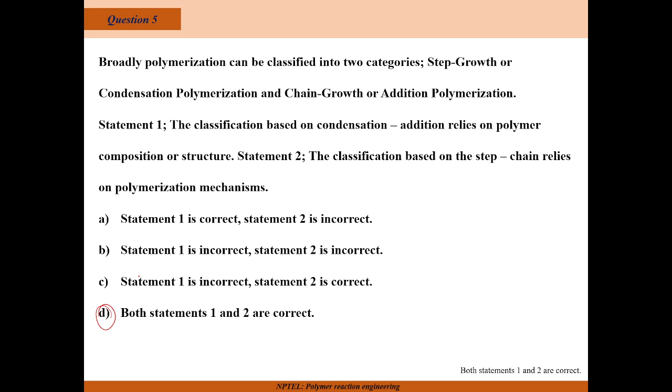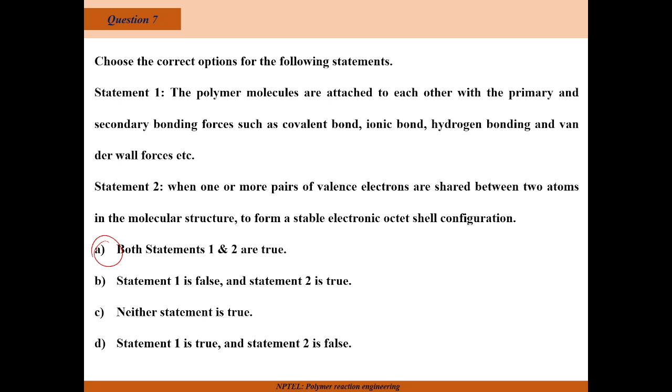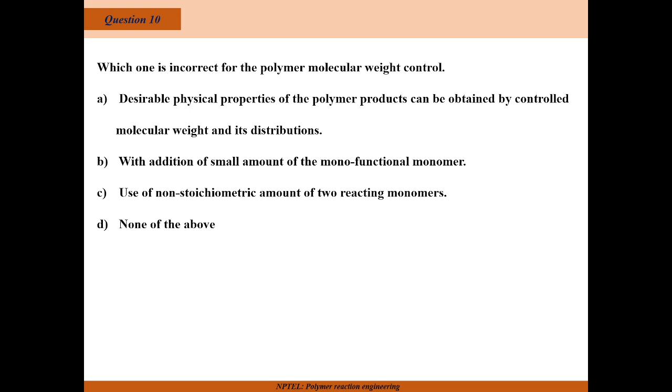With the addition of a small amount of monofunctional monomer, definitely we can control it. It will attach at one end, and there is no other end for further monomers to attach. So that is a true statement. Use of non-stoichiometric amounts of two reacting monomers will definitely lead to some kind of termination, which leads to control of the polymer molecular weight. So the correct option is option D, none of the above. Okay, now let's move on.

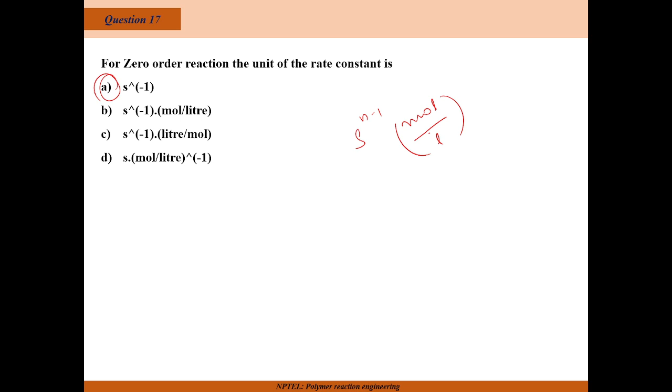Okay. So for a zeroth order reaction, the unit of rate constant is dash. So we have discussed the general formula for this. Okay. So yeah, the answer to this question is second inverse. So the general formula which we discussed was second to the power n minus 1, mole per liter to the power n minus 1. So this was the formula that we used, and by this, when n is equal to 0, we can get s inverse. So the answer to this question is s inverse. Okay, fine. So let's move on.

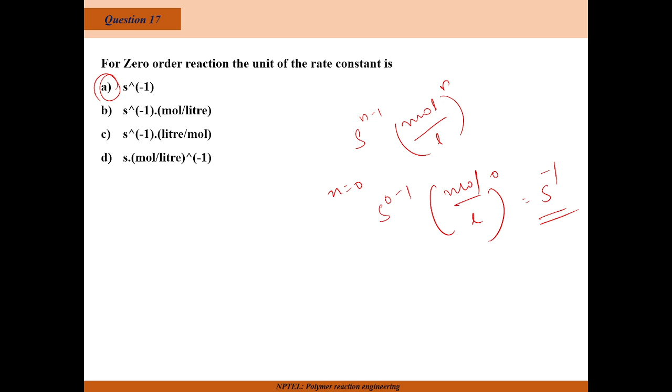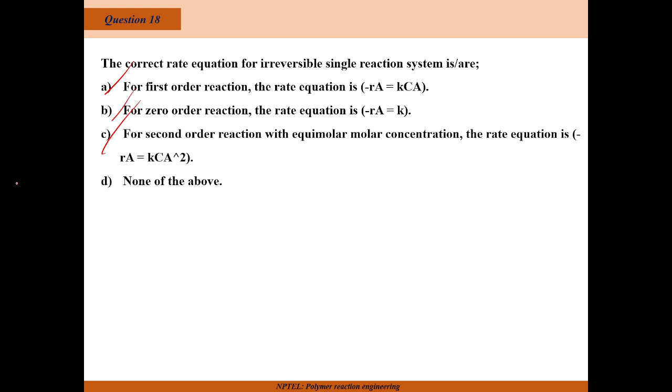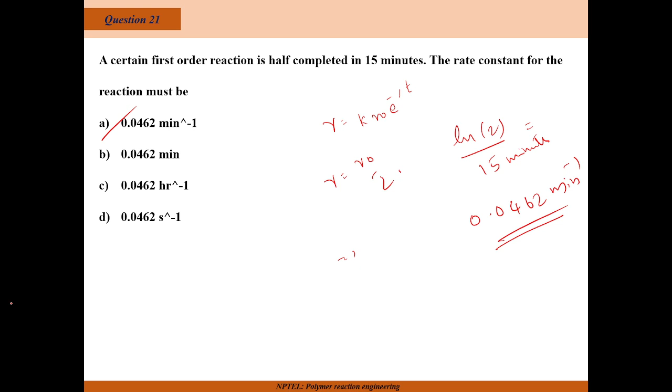Okay, so we know the general formula. It was something like R equals K times R naught, e to the power minus lambda t, and it says that R becomes R naught by 2. Rearranging, we can get the answer. The point becomes log 2 by 15 minutes. When we solve this, it gives an answer of 0.0462 per minute. So this is the answer.

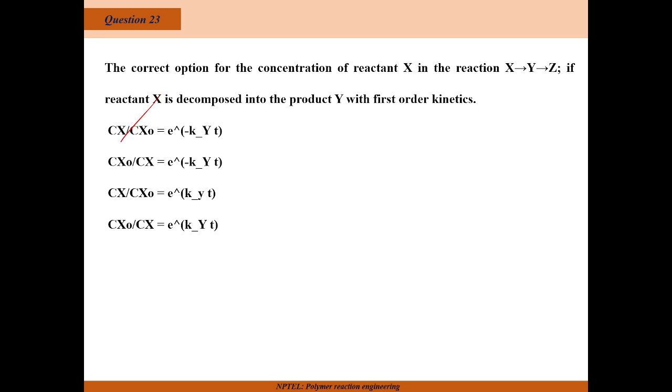Okay, so the answer to this question is option A. This is the correct option. Cx by Cx naught is equal to e to the power minus k into t. So this is the correct option. Okay, now let's move on.

For a recycle reactor, select the correct option. There are multiple options here. Just try to read and I'll discuss the answer later.

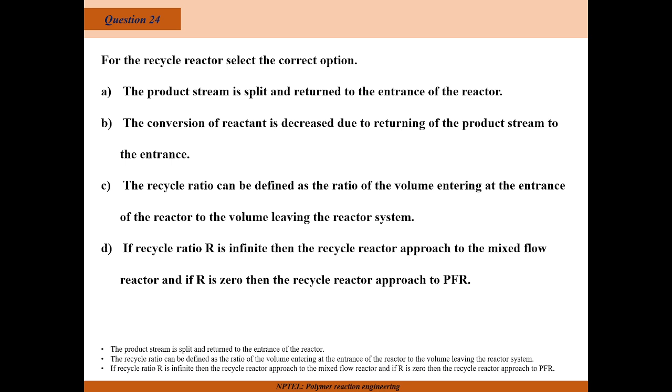So the correct answer is, there are multiple correct options. The product stream is split and returned to the entrance of the reactor. The recycle ratio can be defined as the ratio of volume entering at the entrance of the reactor to the volume leaving the reactor system. If recycle ratio R is infinite, then the recycle reactor approaches a mixed flow reactor, and if R is 0, then the recycle reactor approaches a PFR. Okay, so these are the statements.

So now let's move on. This is the 25th question. If recycle ratio R is infinite, then the recycle reactor approaches a plug flow reactor PFR, and the performance equation of the recycle reactor will become the same as the performance equation of PFR. So is this a true statement or a false statement? Just think for a while, then we'll discuss the answer.

Okay, so actually this is a false statement. It doesn't become a plug flow reactor. The recycle reactor with recycle ratio 0 will become a PFR, not when R is infinite.

So let's move on. This is a two statement question, and there are four options. We have to say which one is correct and which one is wrong. The first statement is: in an autocatalytic reaction system, one of the products acts as a catalyst. Statement 2: to start an autocatalytic reaction, there is a need for a small amount of product. So which one is correct? Just think for a while, then we'll discuss the answer.

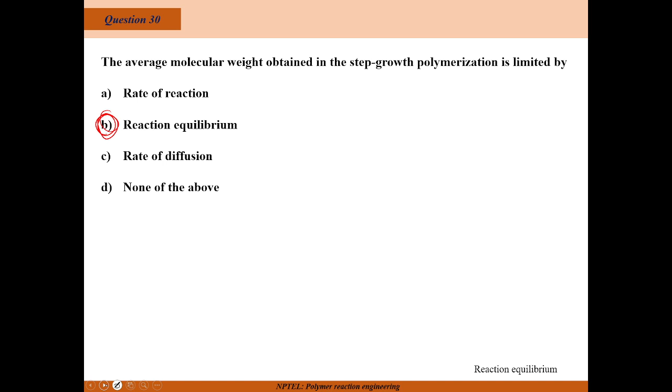Which of the following polycondensation techniques is useful in the manufacturing of reverse osmosis membranes, encapsulation of inks, insecticides, and medicines?

There is definitely something for reverse osmosis, and this is an interfacial process, so from that itself we can say the answer is interfacial polycondensation. Now let's move on.

The termination in ionic chain polymerization can occur through: recombination of counterions forming sterically hindered ions having very broad charge distribution, forming a sterically hindered ion having a very narrow charge distribution, or none of the above. Which one is the correct answer? Just think for a while, then we'll discuss the answer.

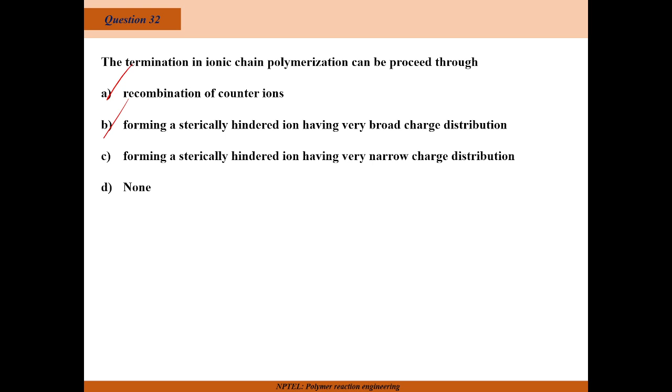The correct answer is that multiple options are actually correct. The first correct option is recombination of counter ions, and the second is forming sterically hindered ions having a very broad range of charge distributions. So A and B are the correct ones. Now let's move on.

Moving to the next question, this is also a two statement question. Statement 1: free radical species formation occurs through homolytic cleavage. Statement 2: the number of free radical species present in the system should always be high to propagate the radical chain polymerization. Options: statement 1 true statement 2 true, statement 1 false statement 2 false, statement 1 true statement 2 false, statement 1 false statement 2 true. Which is the correct option? Just think for a while, then we will discuss the answer.

The correct answer is that statement 1 is true but statement 2 is false. So option C is the correct one. Now let's move on.

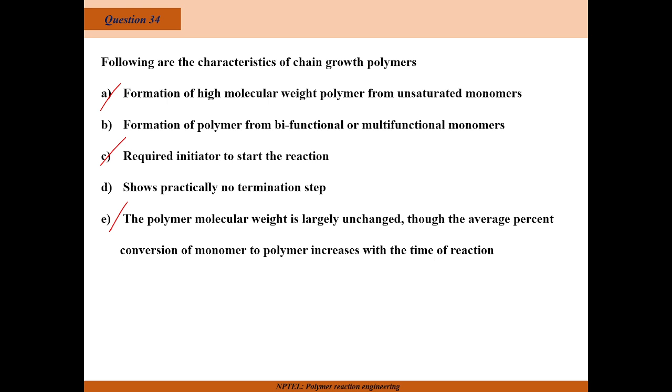Let's move on to question 35. Statement 1: ionic polymerization is monomer selective, that is, a specific type of monomer can be polymerized through a specific kind of ion depending upon the resonance characteristic induced with the specific functional group. Statement 2: radical polymerization can usually be used to polymerize most of the addition polymerization species. Which one is correct?

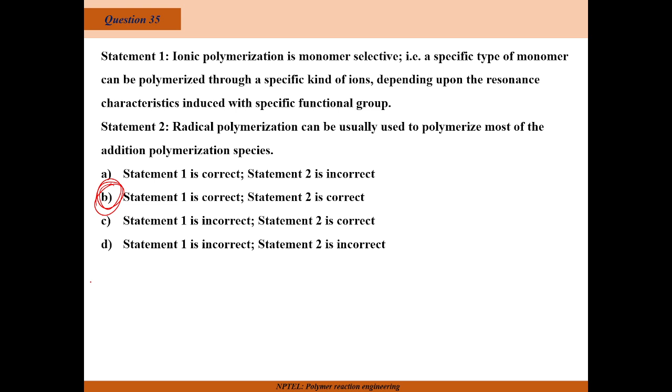The correct option is that both statements are true. Statement 1 is true and statement 2 is true. Now let's move on.

During ionic polymerization, the polarity of the solvent affects the polymerization reaction, and hence preferably the polarity of the solvent should be: low polarity, moderate polarity, or high polarity. Water should be added to increase the polarity. Which one is the correct one? Just think for a while, then we'll discuss the answer.

The answer to this question is that it should be of moderate polarity. Okay, fine, now let's move on to discuss the next question.

The rate of disappearance of initiators in chain polymerization reaction generally follows: zeroth order kinetics, first order, second order, or third order. Which one is the correct answer? Just think for a while, then we will discuss this.

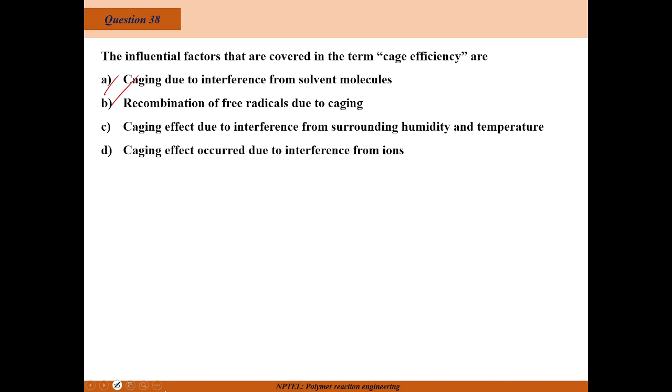Now let's move to the next question: inhibitors are used to start the termination of the polymerization reaction, to avoid premature thermal polymerization during transportation and storage, to avoid ionic species formation during the polymerization reaction, or all of the above. Which one is correct? Think for a while, then we'll discuss the answer.

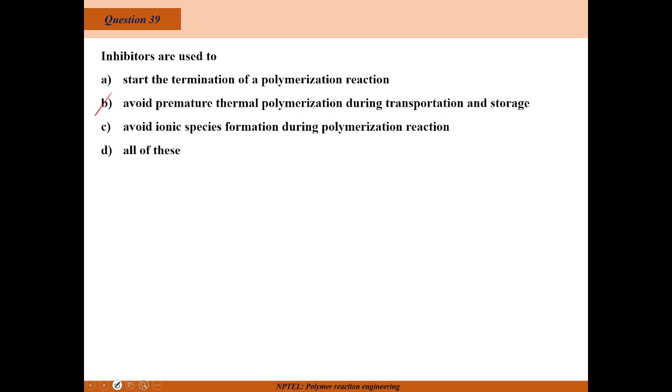The correct answer is to avoid premature thermal polymerization during transportation and storage. Now let's move on to the next question.

The rate of propagation for radical polymerization involving inhibitors is: directly proportional to concentration of inhibitor, directly proportional to square root of concentration of inhibitor, inversely proportional to concentration of inhibitor, or inversely proportional to square root of concentration of inhibitor. Which one is correct? Think for a while, then we'll discuss that.

The answer to this question is inversely proportional to the concentration of inhibitor, which is option C. So that is the correct answer. Okay, now let's move on.

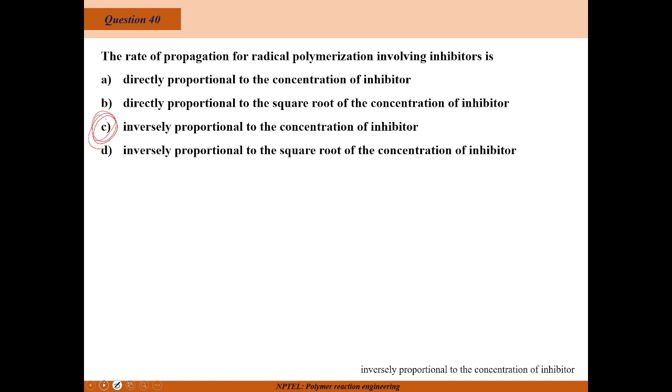The technique which uses the change in volume of the polymerization solution as a parameter to determine the polymerization rate is: mass spectroscopy, precipitation technique, dilatometry, or NMR technique. Which one is correct? Think for a while, then we'll discuss the answer.

The answer to this question is dilatometry. Dilatometry is a technique where we measure the polymerization by measuring the change in volume of the solution. Now let's move on.

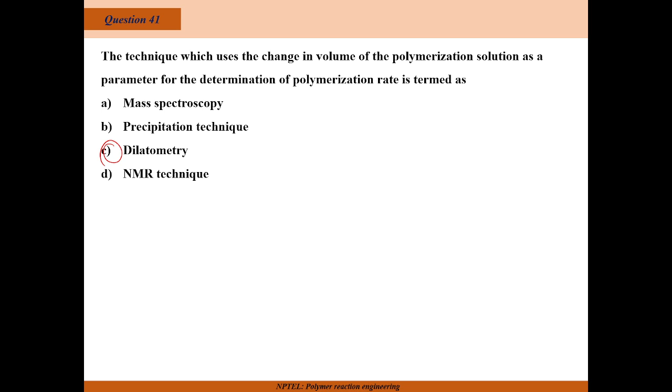Which of the following compounds can be used as an initiator in aqueous medium: hydrogen peroxide, formic acid, hydrazine, or sulfonic acid? Think for a while, then we'll discuss the answer.

The correct answer is hydrogen peroxide, so A is the correct answer. Now let us move on.

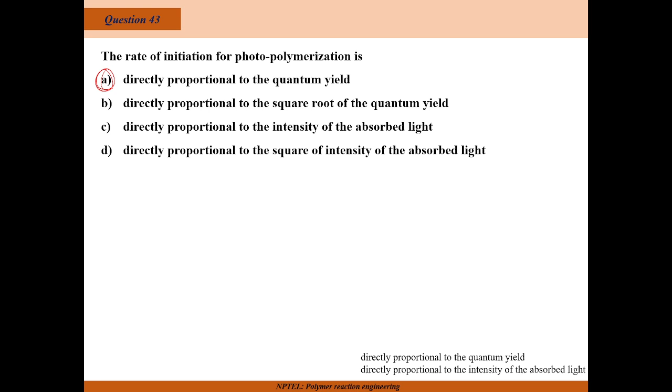The answer is already given, so there is no need for you to think. The rate of initiation for photopolymerization is directly proportional to quantum yield, and it is directly proportional to the intensity of the absorbed light. So the correct options are option A and option C.

Now let's move on. The rate of propagation for photopolymerization is - this question is about propagation, while the previous question was about initiation. Think for a while, then we'll discuss the answer.

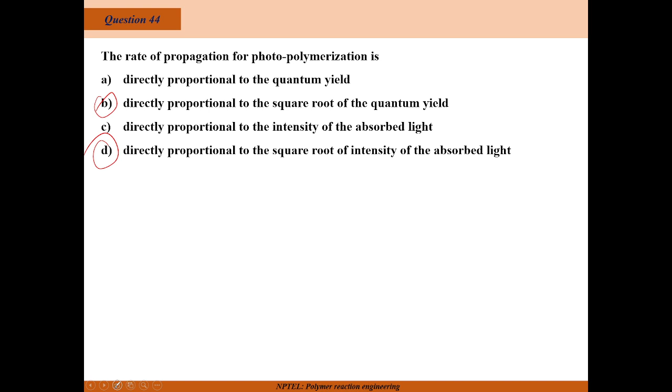The device used for calculating the intensity of absorbed light during polymerization is: dielectrometer, actinometer, tensiometer, or rotameter. Which one is correct? Think for a while, then we'll discuss the answer.

The correct answer to this question is actinometer. Generally, actinometers are the devices that calculate the intensity of absorbed light during polymerization. Okay, let's move on.

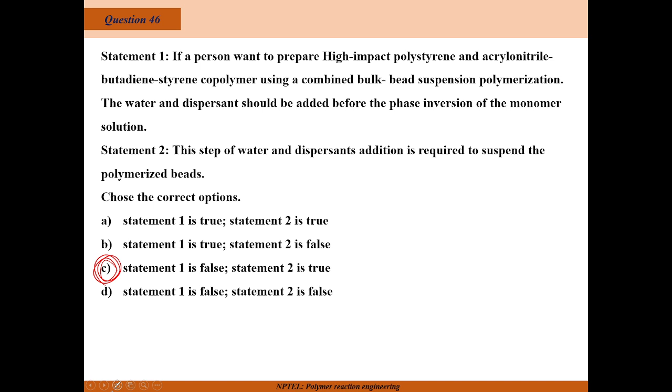The correct answer is statement 1 is false and statement 2 is true. Statement 1 is false and statement 2 is true. Let's go to the next question. This is also a statement question.

It says that in semi-continuous and continuous emulsion polymerization, sufficient free emulsifier is usually required to stabilize the oligoradicals that precipitate in the aqueous phase. Statement 2 states that in semi-continuous and continuous emulsion polymerization, sufficient free emulsifier is usually required to saturate the surface of existing interfaces and form micelles.

So which statement is true? Statement 1 is true, statement 2 is true; statement 1 is true, statement 2 is false; statement 1 is false, statement 2 is true; statement 1 is false, statement 2 is false. So which is the correct option? Just think for a while, then we will discuss the answer.

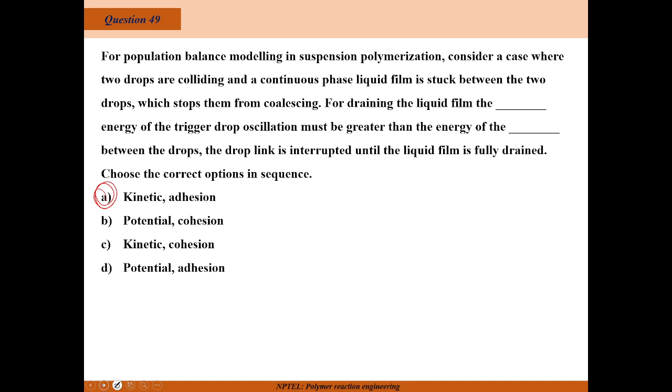So the correct answer is kinetic energy and adhesion. Option A is the correct answer. Now let's move on to the next question, which is the 50th question. During drop coalescence process in suspension polymerization, the drop will coalesce if the energy of collision is dash than the total drop surface energy. Which one is correct, greater or smaller? Just think for a while, then we will discuss the answer.

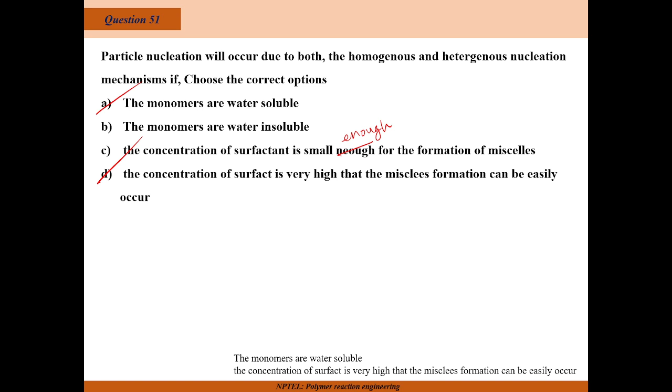So yeah, the answer is already given here. So the correct answers should be water soluble and the concentration of surfactant is very high that micelle formation can easily occur. So these two are the correct options. Okay, fine. So let's move on to our next question.